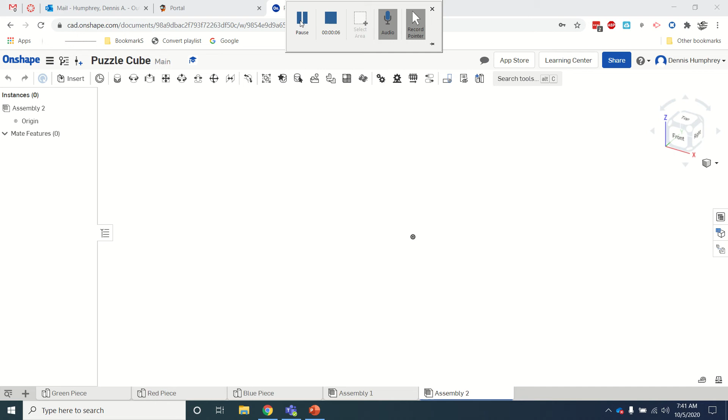At this point I have made 3 pieces: a green piece, a red piece, and a blue piece. They're all in the same puzzle cube if you did it the way I explained last time. After you make a piece, if you just click on this and click Create Part Studio, it opens up a new one down at the bottom, so everything is in the same place. It is way easier. This is where I already put one together, but so I opened up a new one.

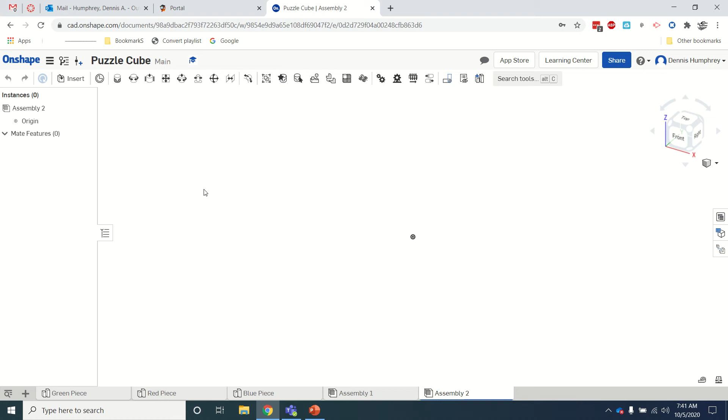I just clicked the plus sign and clicked New Assembly to get this one. To do this now, I need to bring in my parts, so I click on Insert. They're already here. If they weren't, I would have to go to Other Documents and My Onshape - here's some that I made before. So if you didn't put them all in one place, you could go to Other Documents and your pieces should show up over here.

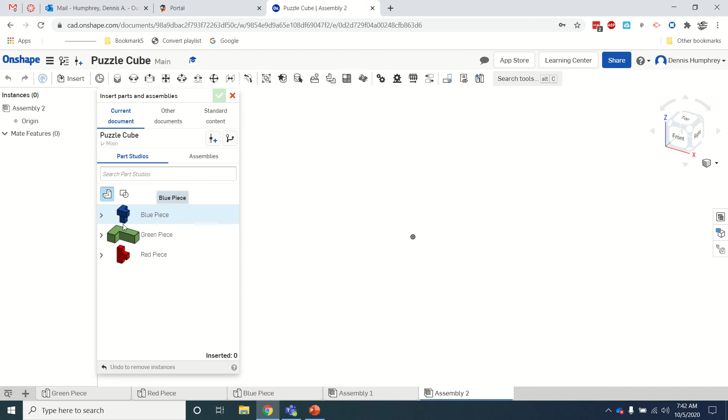But I have them in here, so I'm going to bring in my red piece, my green piece, and my blue piece. Actually, what I'm going to do is click my check mark here, and for right now I am going to delete the green piece, because I really recommend you only bring in one piece at a time, since otherwise it gets pretty cluttered.

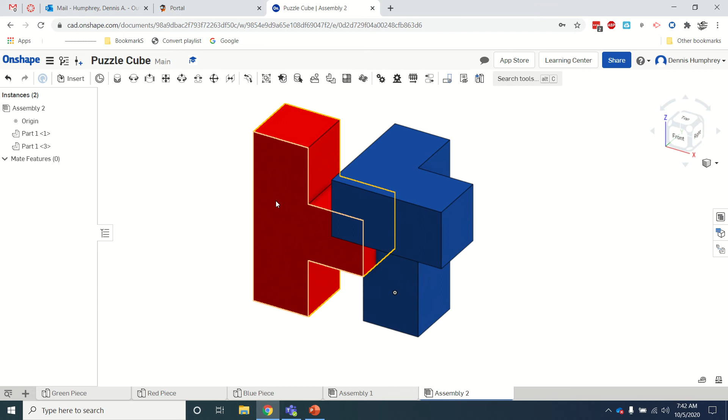So now these pieces should move freely. My computer's a little laggy. They move freely around, but what I want to do is fix one of them, so I'm going to fix this red piece.

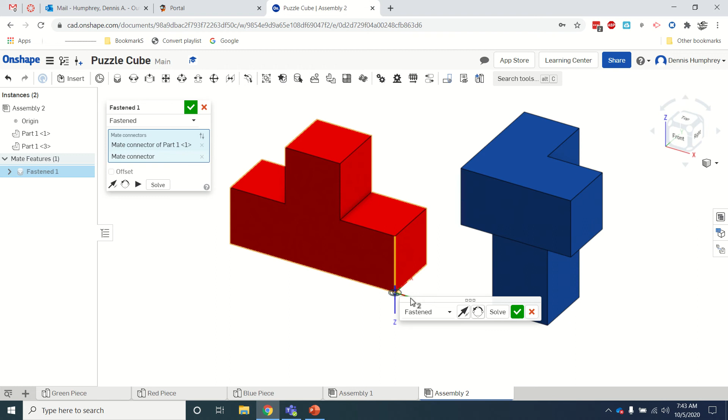This was my origin. So up here you have Fastened - I click on Fastened, and I'm going to click on... it doesn't really matter, so I'll pick that little connector there and that connector there, and click my check mark.

Now let me just close that. This does not move. This moves. So now I'm going to move this around so that it actually comes along this side and hooks up over here. This is different than Inventor, which is kind of the problem - if you're doing this instead of Inventor, it's going to be difficult later on.

But this will let you do most of our projects. So we're going to do it the Inventor way, as close to Inventor as we can, which means we are going to be using a planar mate.

So I click here, I'm going to click here, I'm just going to click on the surface. There's a lot of different ways you can do this, but I found this works pretty well - this is the closest to doing it with Inventor. I go to the open surface and double click, and that's going to connect to this surface.

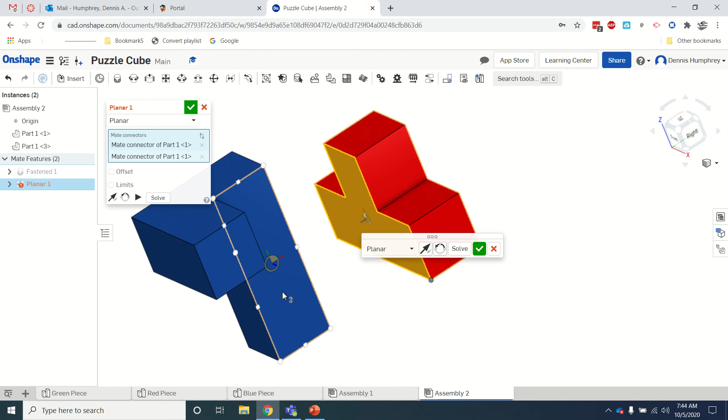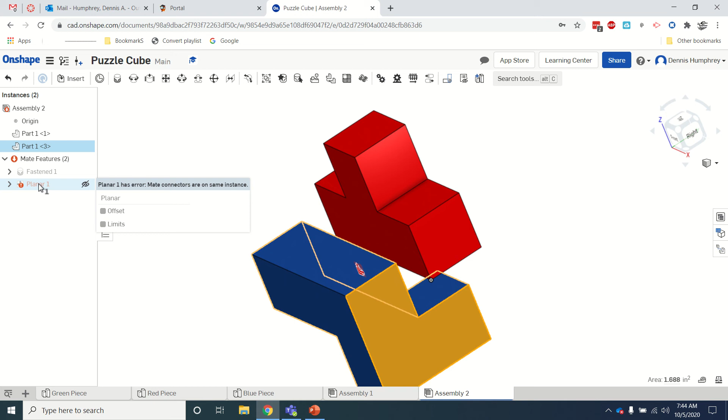So I double click, let me try a couple things here, because that didn't do anything, and that didn't do anything. Oh wait, here - nope. Okay, well then we'll just select that then. Whoops, let me close that. It didn't like it. You may see during this video I have to do some things because I'm kind of experimenting here.

Let's just delete that for right now and start over again, because I think that was one thing you can do. I want to get it close to the way I want it. If I click on it once, I get these little moving things. So this one right here, I can swing this around.

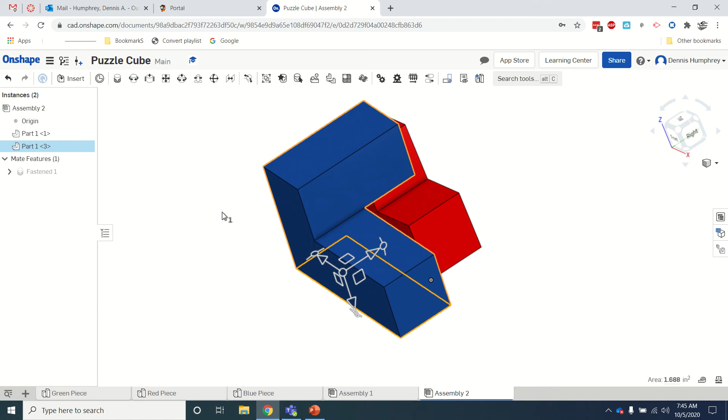Hit enter. Wow, I'm moving slow today. I can hit escape, click outside. So now this is kind of where it goes, like that. If you click on it once, you've got all these things you can rotate however you want to get it close. I'm just going to hit escape and click outside.

All right, so let's try this again - planar mate.

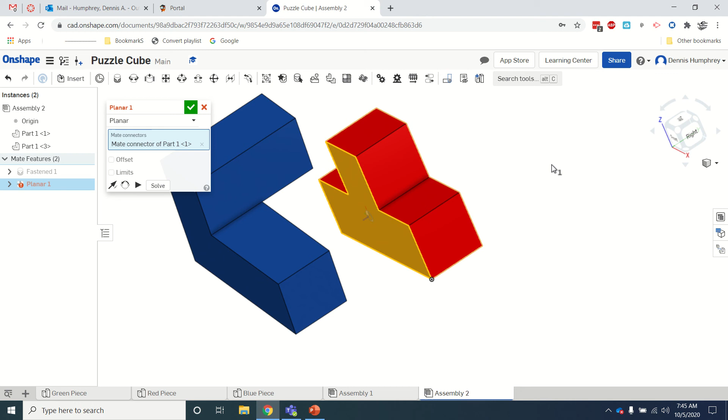I'm going to right click with my mouse to rotate over and see this. Oh, much better. Okay, and so then I click this, and now it is connected the way I want it to.

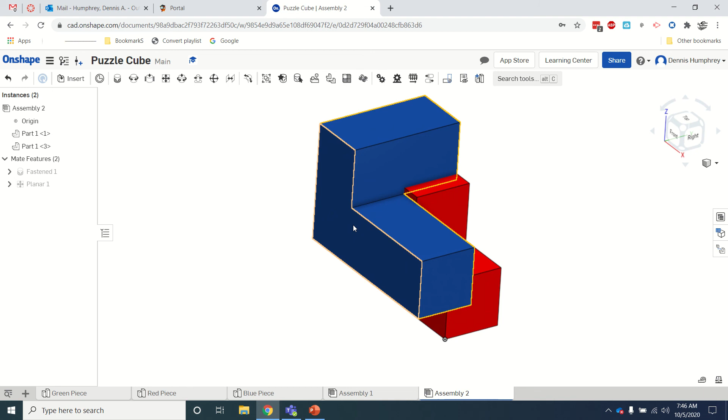All right, but it still has a lot of what we call degrees of freedom, because this can still move this way, it can move this way, it could rotate. There's a lot of things it can do. So what we want to do is eliminate those degrees of freedom.

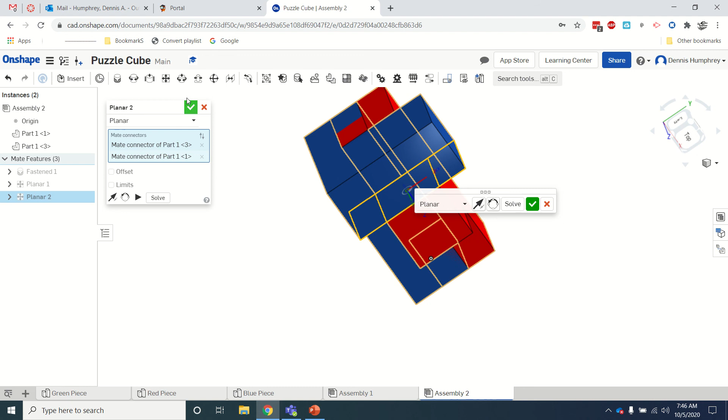So planar mate again, click here, right click, rotate, and I want to come down to get this. You see these little colors there. I want to make sure that it's the same color going out as it was from the other, and they're both blue. So I can click on that, and it looks kind of crazy, but I believe once I click this, it moves back to where it's supposed to be.

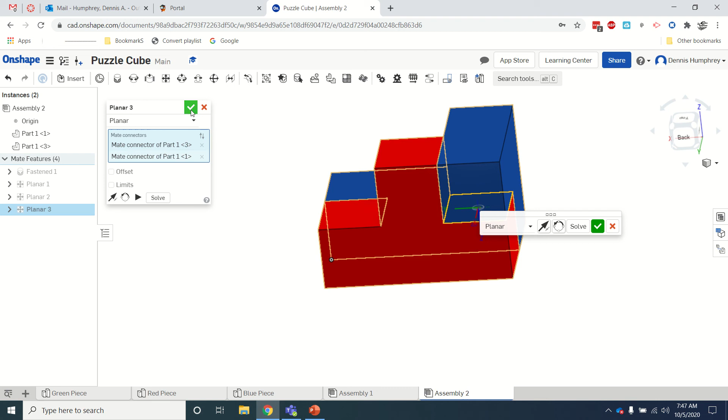Now, it looks like it's done, but it's not. There's a degree of freedom here. See, it still does this. So I'm going to rotate over here because I want to eliminate all of those. I'm going to do one more. You can see the blue is sticking down there. Right click, go to here, click that, booyah.

Okay, and now that is completely locked together. This will not move at all. Remember, this is already locked to the origin. So that's how you do it.

Basically, using this planar mate. You generally do it, like I said, the Inventor way. There's other ways of doing it, and some are easier, but I want you to do it this way, because this is what you would be doing. In Inventor, you would have a mate and a flush. A flush would be to even these two surfaces, but I haven't yet quite figured out that version in here.

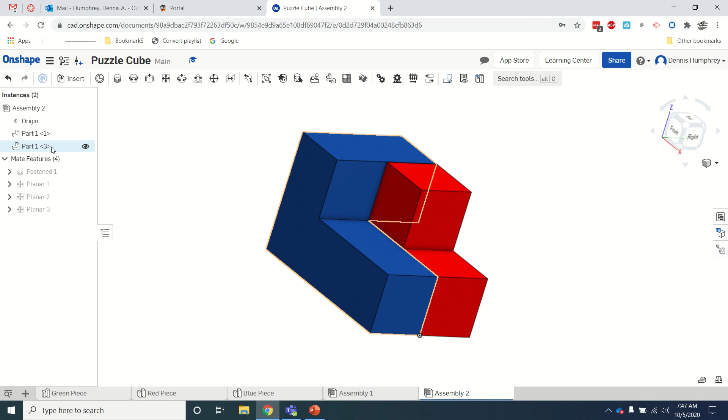Maybe I will eventually. Okay, so let's bring in my other part. And that is going to go like here and here. So if I click on this once, I want it to go, this is actually kind of nice. This works pretty well. I want to bring it up to here, and then I want to rotate it around to here. I hit escape and hit enter, and whatever, and that goes away.

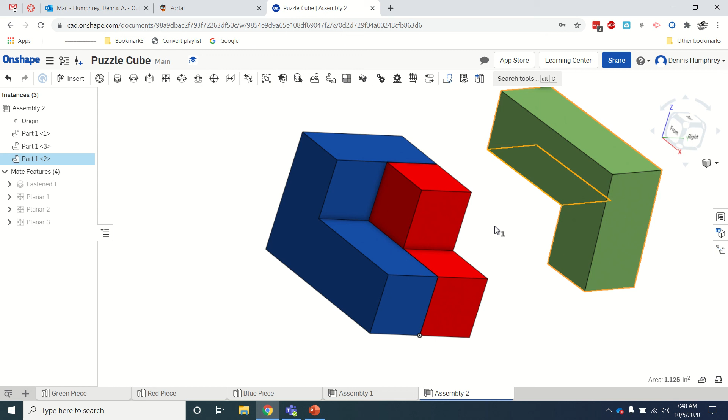So that works really well to get it oriented. It actually works better than Inventor. That's really nice. And now I think you can see what I'm going to be doing here. I'm going to do my planar mates. So this one is going to connect to this one.

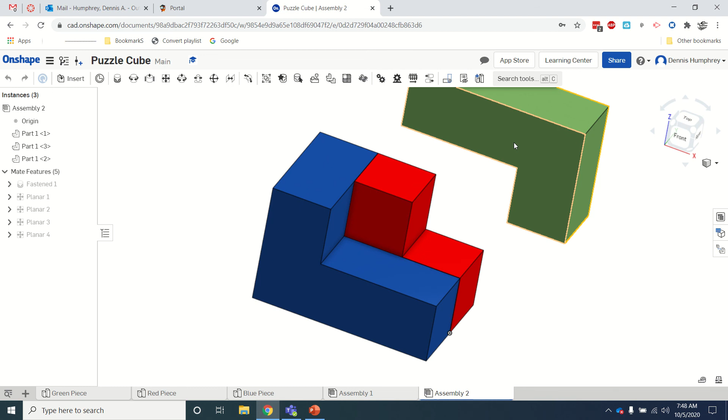And then, now see, it looks like it's all good, but it's not. I want to lock it in completely. So I'm going to do a planar mate, that to... you could pick either one of these. You want to be in the middle though.

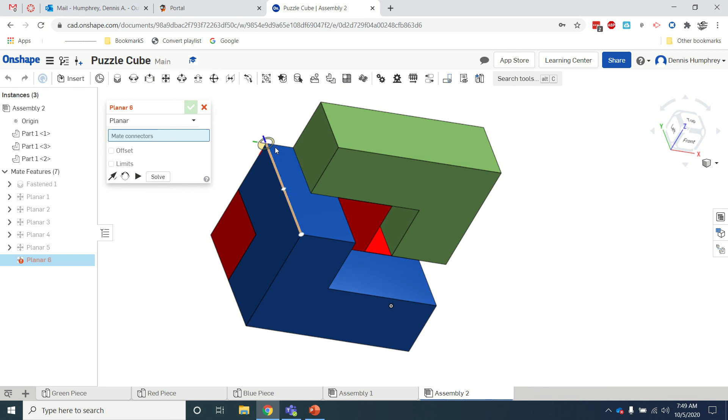And then let's try something here. I think that maybe if I do a planar mate and I get... let's try it, I got nothing else to do. If I do that little guy right there, this little guy right here, whoa, well wait, let's see what happens though. Nope, okay, that didn't work. So I'm gonna back up one.

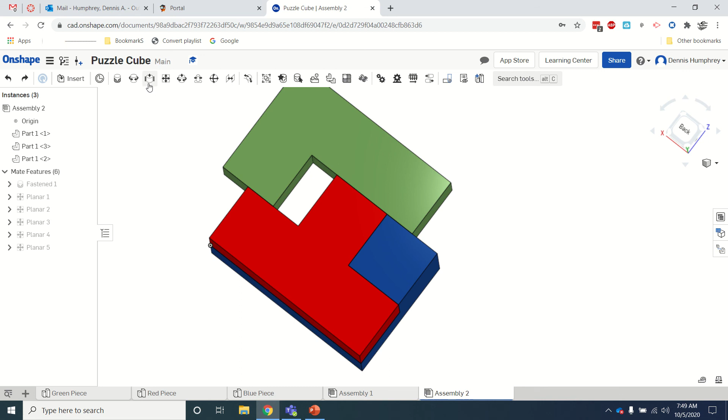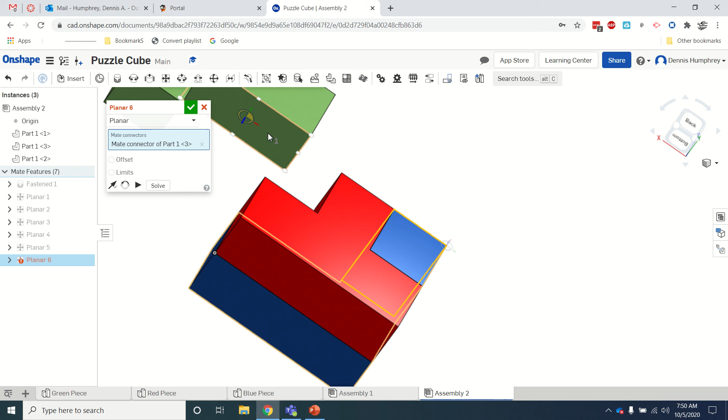There's a way to connect basically that to that, which is what I'm looking for. Let me close it and move it all the way out so that it's all by itself. Because then I think if I got that one, see I got the blue going up from that corner. Now this one, the blue's going the wrong way, but if I come over here first and then go there, see what happened? If I come here and go here, my blue's going that way. I need my blue going down, so I hover over the bottom, haven't clicked yet, and then go to this one. I think I'm good.

Not. Isn't that interesting? It did not like that. You can see it doesn't like it. So let's see, what else does it need? Why not just that?

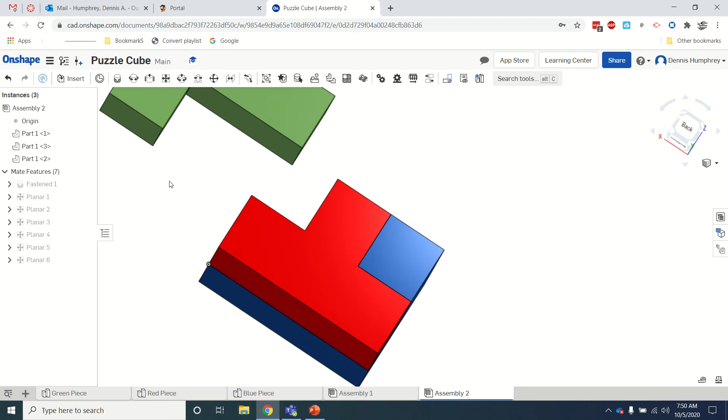All right, we'll just do it the old-fashioned way, and that would be to planar mate that surface with that surface. Wait, make sure I get the right one. And that I know is good. Waste a little time there, but that's okay. And if anybody figures out how to do it differently... So that's the same as I got over here. See, that was my other one here.

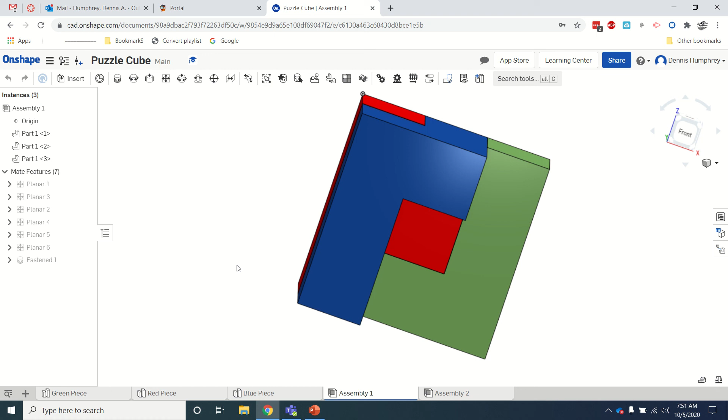And so you do that for all 3 pieces. Like I said, if you put them all in here, they're all in one place. And if they're all in here, the next things we're going to do, the parts list and all that, becomes much easier also. So that is how you do an assembly in Onshape.